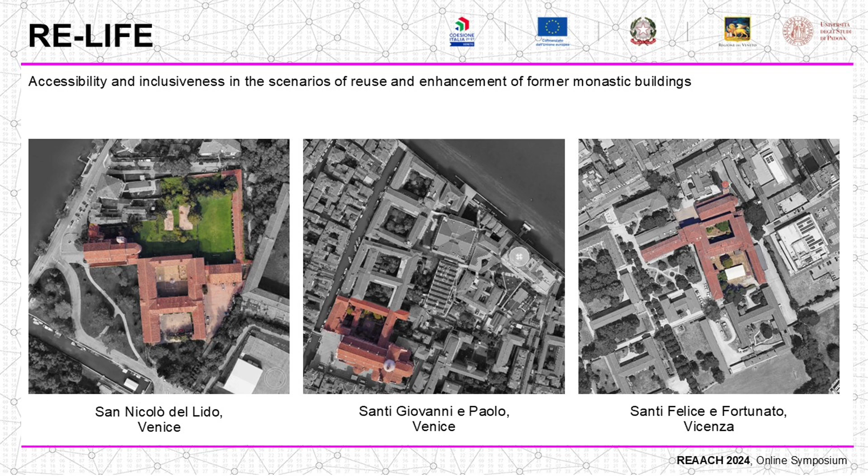In recent decades, the city administration has worked extensively in constant and fruitful dialogue with the Soprintendenza to transform Venice into an accessible city, but much still needs to be done.

One of the primary goals of this project is to explore, based on surveys and analyses including those conducted with the support of AI, interventions that can enable accessibility and inclusivity in the adaptive reuse of the Chiostro della Pace.

In doing so, the project aims to contribute in a modest yet meaningful way to the broader and ambitious goal of making Venice a city for all, a city for everyone.

The history of Santi Giovanni e Paolo began in 1234, when Doge Jacopo Tiepolo, inspired by a miraculous dream, donated a vast public land to the Dominicans on behalf of all the people of Venice. At the time, this plot of land was still awaiting reclamation, which was implicitly entrusted to the friars.

The monastery, now used as the civil hospital of Venice, stands in the northern part of the vast lot donated by Tiepolo. By 1486, it had reached its final plan layout, as the Dominican Felix Fabri describes: three courtyards and spacious gardens, dormitories and refectories and vast workshops, within which live 100 friars.

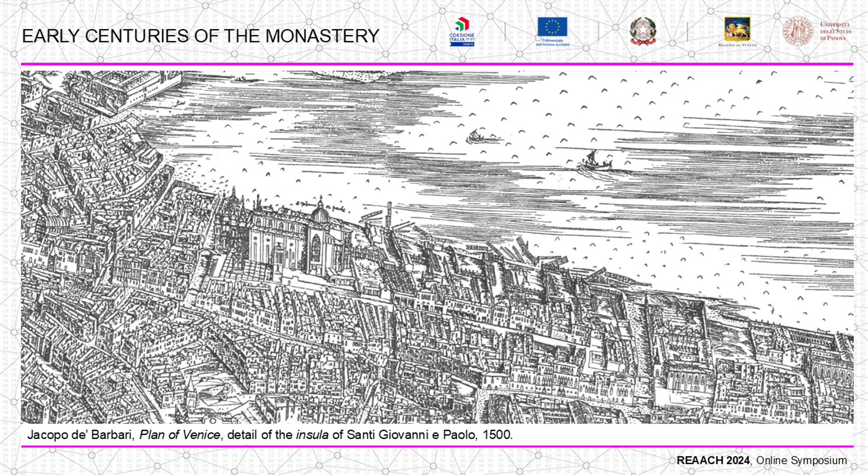A large atrium, preceded by the monumental facade of the Scuola Grande di San Marco, gave access to the convent, even though the actual entrance to the main cloister was the chapel of Madonna della Pace.

Erected between 1489 and 1503 by the master of the Dominican Gioacchino Turiano, the chapel housed a miracle-working image from Constantinople thought to have the power to bestow peace on those with personal and family problems.

The chapel of Madonna della Pace and its prodigious host defined the path of the devotee visiting the monastery. Coming from the square before the great mendicant church, he would enter the chapel to pray, then he would exit through the side door to enter the cloister.

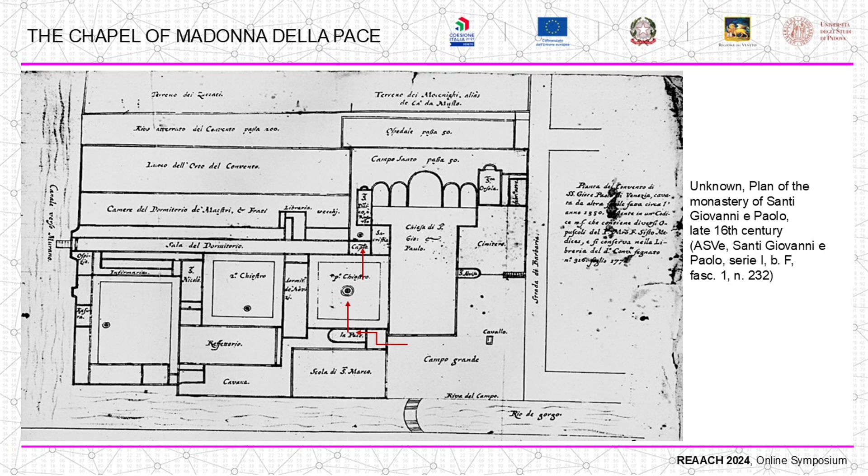Eventually he would make his way to the friars' capitolo, where he could find legal assistance. Therefore, this space had a strong functional and social permeability with the urban context. Here, lay and religious met under the auspices of Our Lady of Peace.

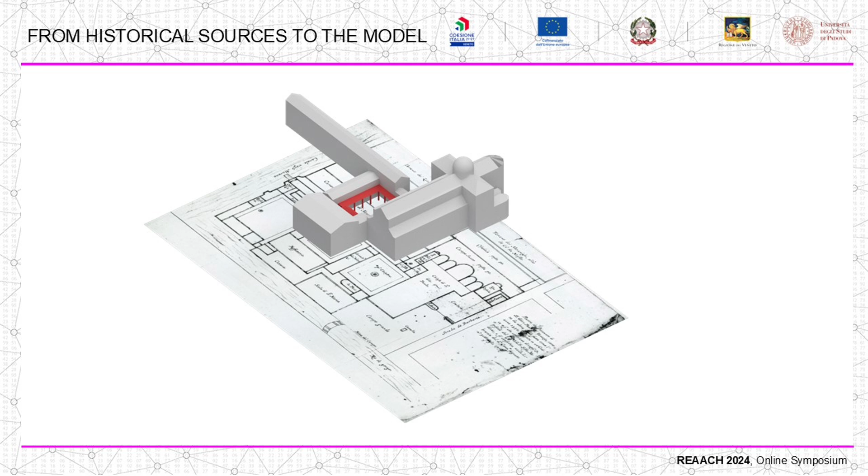From the 1500s plan of Santi Giovanni and Paolo, a 3D model of the ancient framework made by the Basilica of Santi Giovanni and Paolo, the Scuola Grande of San Marco, and a part of the monastery around the cloister was erected. In particular, the plan was useful to obtain the shape and the location of the chapel of Madonna della Pace and the Chiostro della Pace, near the chapel.

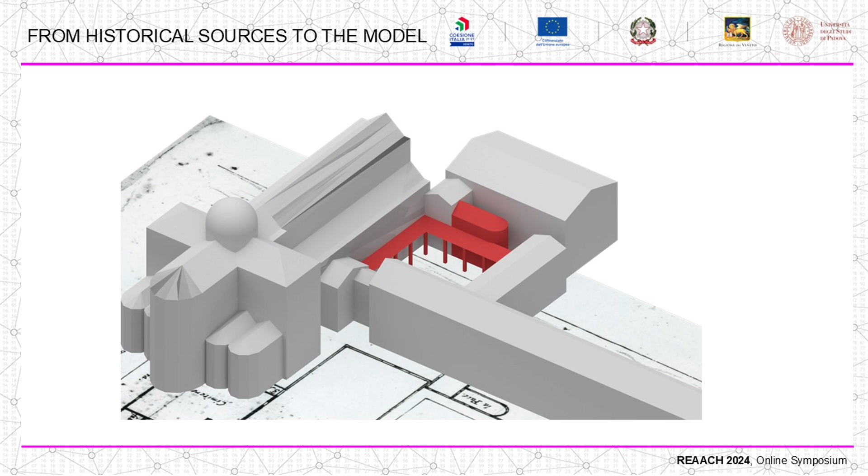In this work-in-progress model, the main volumes can be identified. A previous 3D model of the current area made by the Basilica of Santi Giovanni and Paolo and the Scuola Grande of San Marco was created, intertwining different information taken from maps and architectural plans.

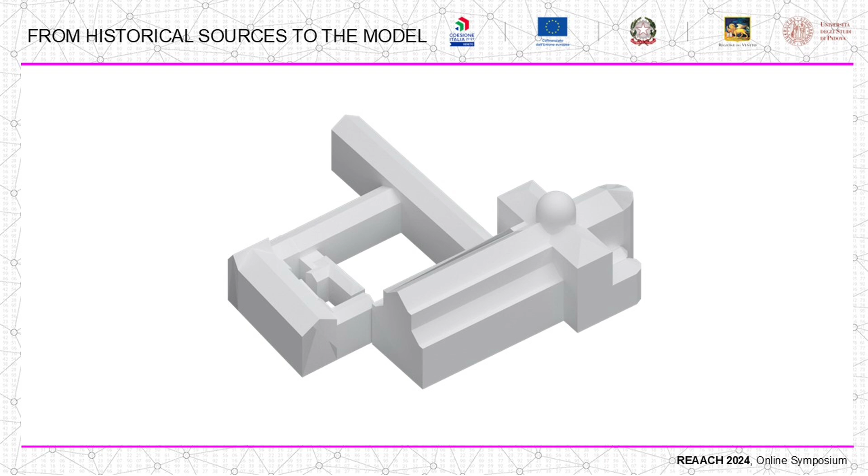To achieve a high-quality result, it was necessary to interlace the historical research with the survey results obtained from photogrammetry and from new technologies.

In recent years, the evolution of image-based survey technologies has significantly expanded the possibilities for the documentation and preservation of cultural heritage. Specifically, the emergence of innovative techniques such as neural radiance fields, NeRF, and Gaussian splatting has marked an important step forward compared to traditional methodologies, allowing us to overcome some of the limitations of conventional photogrammetry.

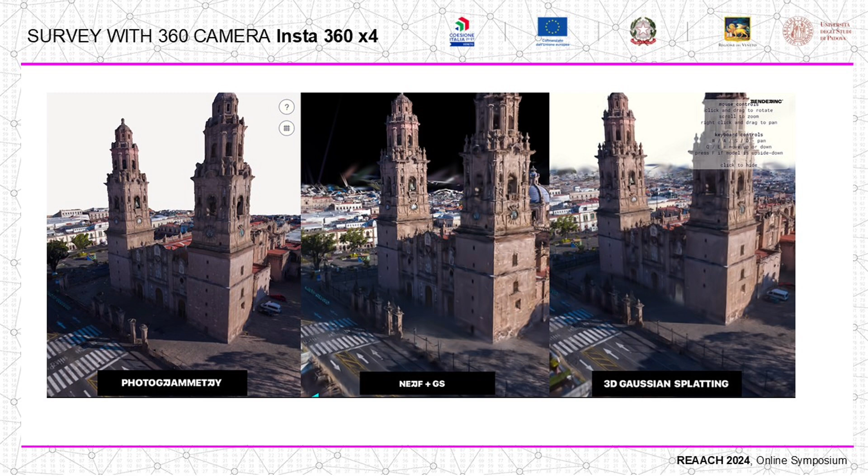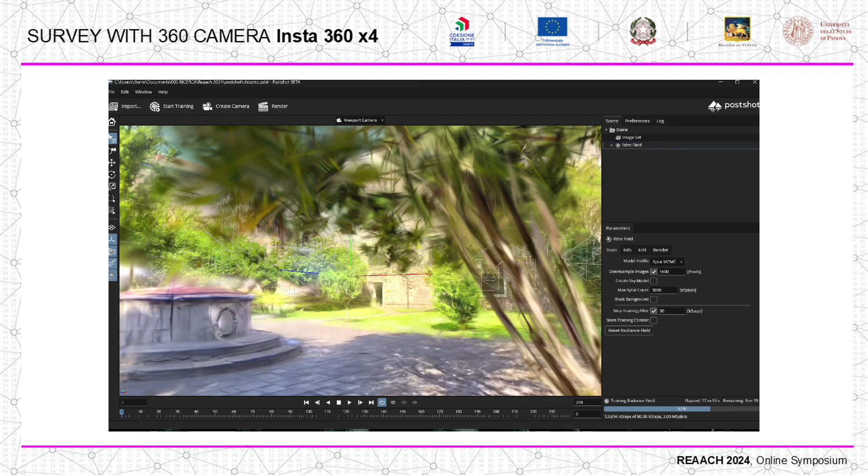As demonstrated in the case study of the Chiostro della Pace, the use of these technologies complements, rather than replaces, traditional survey methods. On one hand, they allow the creation of high-quality visual models aesthetically suited for immersive visualization and cultural dissemination. On the other hand, they do not yet achieve the precision and reliability required for highly accurate metric and quantitative surveys.

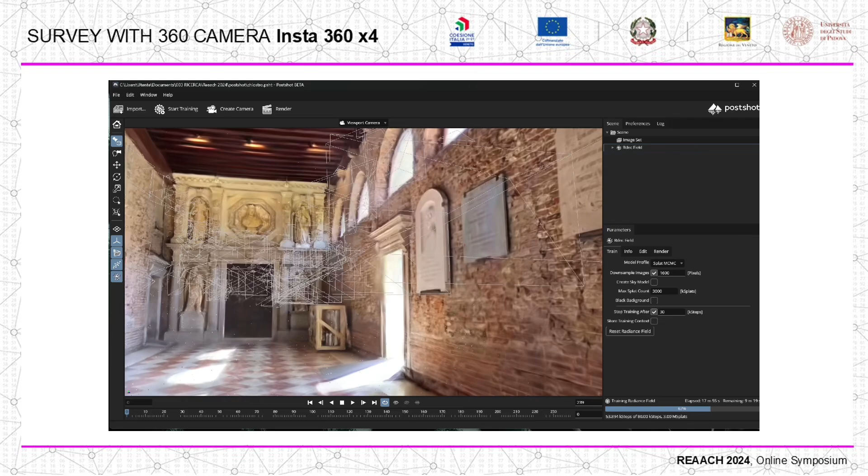The integration with post-production software like Postshot and game engines, such as Unreal Engine or PlayCanvas, has further expanded the possibilities for utilizing these models, enabling the creation of increasingly elaborate interactive and immersive experiences. This is particularly relevant in the field of cultural heritage enhancement, where engaging the public through detailed digital reconstructions is proving to be a powerful tool for education and preservation.

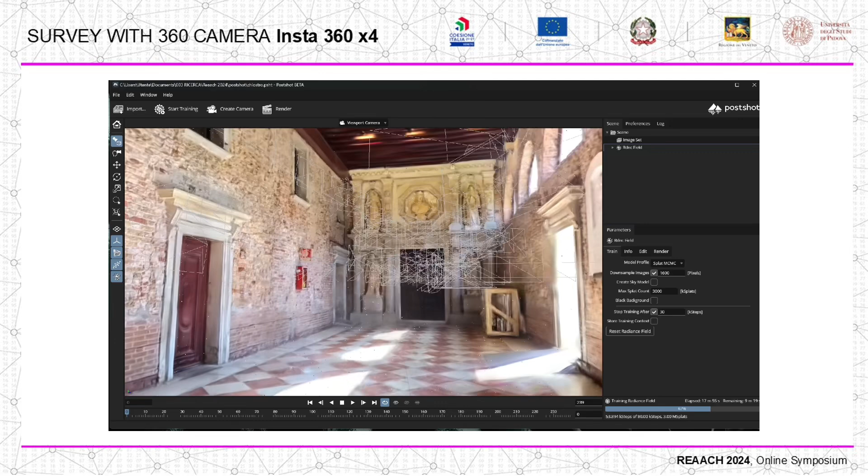The survey of the Chiostro della Pace at the Monastery of Santi Giovanni and Paolo was carried out using a spherical camera, leveraging its advanced high-resolution video capture capabilities. The process involved several stages, from data collection in the field to post-production and final processing of the three-dimensional model.

To begin, the camera was mounted on its dedicated selfie stick, extended to its maximum length to position the device above the operator's head. This setup minimizes occlusions and captures a panoramic view of the surrounding environment. The camera was set to record video in 8K, the highest resolution available on the X4 model.

High image quality is crucial, especially when planning to reframe the video in post-production, as it ensures sharp details and better definition. During recording, a slow and steady movement was maintained. The operator walked with the stick and camera overhead, trying to keep a uniform trajectory and a steady pace.

This approach allowed complete coverage of the area of interest, ensuring comprehensive visual data collection from various angles. Once recording was completed, the native spherical video was imported into the software, which offers advanced functionalities for managing and processing the videos captured with the camera.

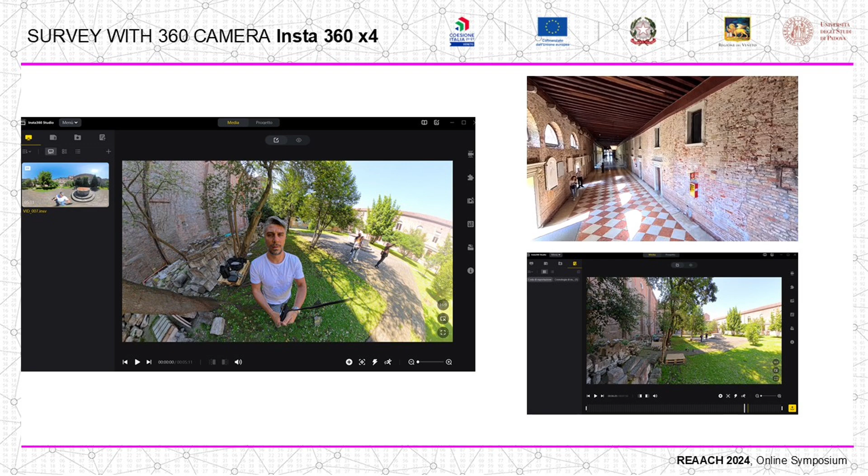This process resulted in the creation of 5 distinct videos, each providing a detailed view in a specific direction. Within the software, the video was converted to MP4 format, proceeding to reframe specific sections of the 360 degree sphere. 5 distinct views were created: north, south, east, west, and zenith, the upward direction to capture ceilings and roofs. This subdivision process facilitates subsequent processing and improves the quality of the final three-dimensional model.

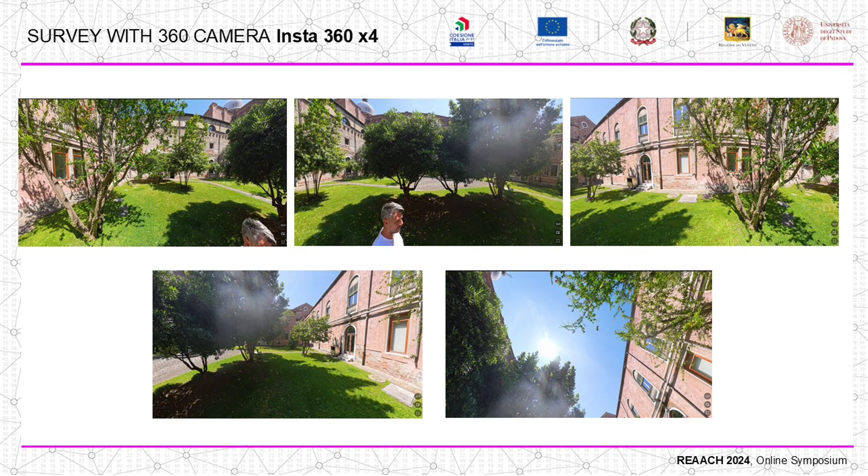The next stage involved the use of the Postshot software. Postshot is a tool that allows simultaneous processing of multiple videos and images, operating locally and leveraging the user's hardware resources. Within Postshot, the 5 previously generated videos were imported for processing.

Initially, it was possible to select the number of frames to use for processing. Given the large amount of data, approximately 1600 total frames, it was decided to limit the processing to 100 frames. This choice optimized calculation times while still maintaining a sufficient level of detail for the survey's purposes.

Next, using drop-down menus, the quality parameters were set, which allow choosing the type of radiance field to use, the maximum number of splats in the case of Gaussian splatting, and when to stop the training process. Among the various radiance fields, 5 NeRF and 2 splat options, Splat MCMC was chosen, as it appeared to be faster and produced better results by allowing an increase in the number of splats present in the scene.

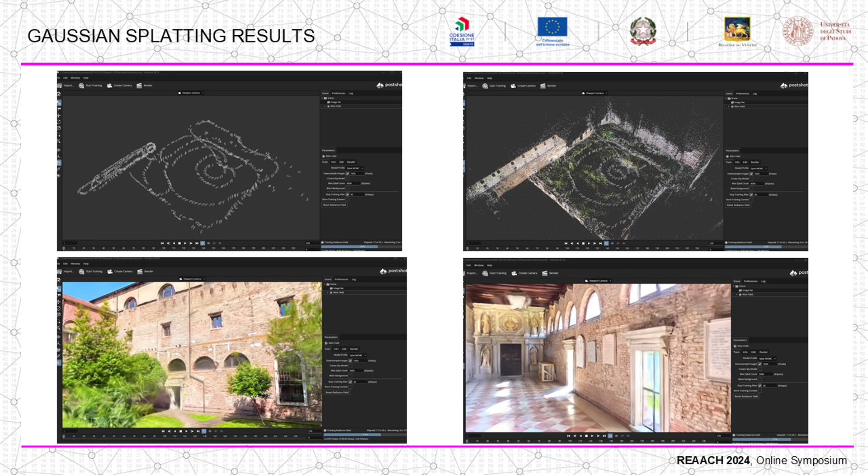The synergy between traditional methods and innovative techniques is the key to a future where the documentation and preservation of cultural heritage will become increasingly integrated and accessible. And this is one of the main goals of this work-in-progress project titled REAACH.